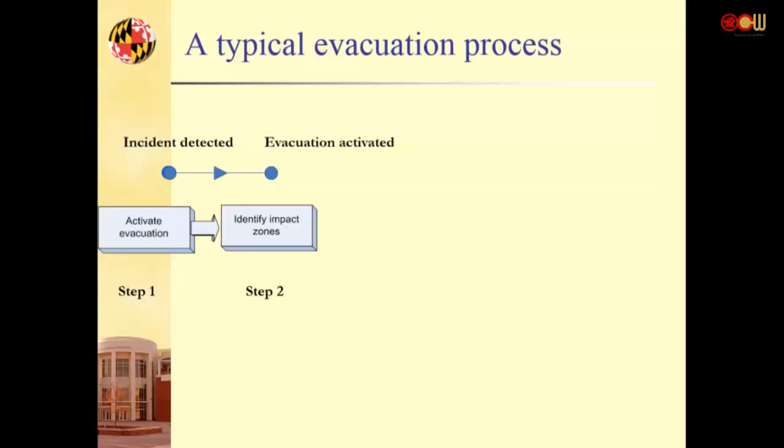And then second, they have to identify where the impact zones are, right? In Baltimore, it's in the harbor. The central part of metropolitan Baltimore is a harbor. So once you have an emergency, then next, how far is the impact going to be? So all those people within the impact zone need to be evacuated. And the first step, you can use Taipei as an example. If something happened in the Taipei downtown area, you need to evacuate. The first one will be what? Evacuate those people who have to walk. Walk to where? Walk to either a subway station or a parking garage. Evacuate the pedestrians first. And then all the pedestrians will be converted into what? Car units or subway units, okay?

In the Baltimore case, we actually include subway, but Baltimore only has one subway line, unlike DC which has 6 or 7 subway lines. So we treat that one as a separate study. So once you evacuate pedestrians, then we mobilize evacuation with passenger cars and transit systems. You have to use a mass transit system or carpool designed to evacuate a large population during a time window. A time window is a window in which you have to evacuate, otherwise you will die or be seriously injured. And then once the passenger cars have been identified and assigned routes, you have to guide them to evacuate in order to safely, efficiently move out of the control boundary. Okay, there's a control boundary.

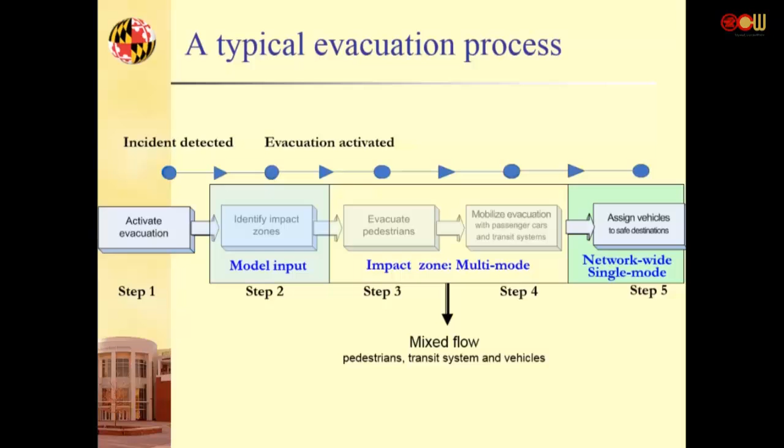And then after everybody gets on the bus, gets on the car, then from Taipei City they want to move to another city, then it becomes what? A single modal problem, because no one is going to walk to evacuate. Then you volunteer to die. Okay, so after some time period, you already load everyone in the car or bus system. Then the problem becomes a single mode network problem.

So this evacuation typically for a large city includes two stages. Okay, first in the downtown area, we think of the impact zone. Impact zone means directly polluted or damaged by some kind of attack, okay, or by natural disaster. For example, Kaohsiung's explosion is counted as one of the natural disasters.

It should have some type of evacuation. Maybe not on a large scale, but still, it could be worse. No? If a serious explosion continues, it could be a big problem. Okay, so that will be an identified impact zone area, and you quickly evacuate all people within the impact zone to a proper area. As I saw from the newspaper, some people died in the process of trying to escape from those areas. Those are examples of not having a well-designed evacuation process.

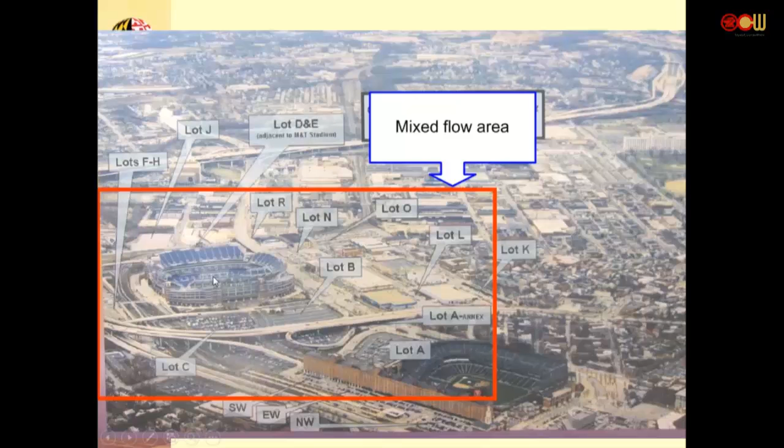Okay, then I will show you non-mathematically where the key issues are, the key components you should cover in doing research in this area. Okay, this is the actual Baltimore case. One of the major issues is downtown Baltimore. This area is a football stadium. A lot of people evacuate from here. So this is close to the harbor. Okay, so if something happened, you have to evacuate those people, or even if nothing happened, after a football game.

So in this fall season now, every weekend they have to deal with the evacuation problem. Of course, the evacuation windows will be a little more flexible than an actual emergency, but it's still a big traffic problem. Okay, so our challenge at that time was, we use this example, compare the police evacuation plan with our own plan, and see whether we really provide a better plan for them or not.

Okay, so Baltimore downtown is the harbor. This stadium is all in the downtown area. If you know Baltimore, you find out this entire city is developed along the downtown and the harbor. It's a nice place to go. Okay. So the first part of your model is different from the traditional model. First part, most people will be where? Inside the building. Okay, unless it's at night. That's different. They will be on the street.

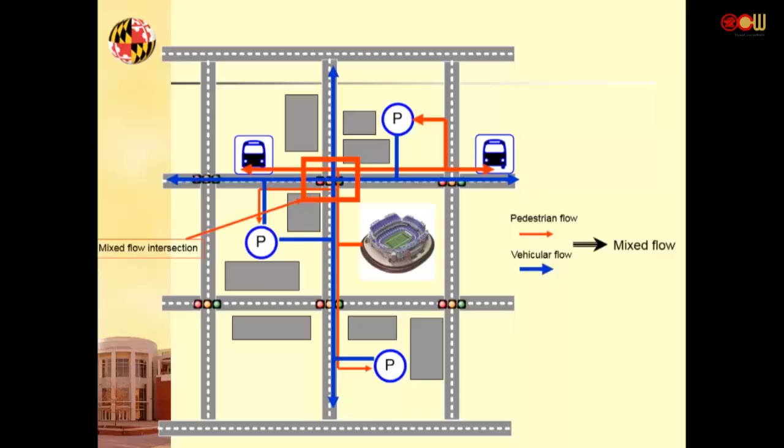And then you have the guided bus route. So here the bus route is different. Here, in this case, we use a school bus to pick up the pedestrians. In the United States, every school from elementary to high school, you always can take a school bus. You always have a school bus. Of course, if your parents want to give you a ride, it's okay. Otherwise, every family is entitled to have a school bus. So we have a lot of school buses. So in this case, we use school buses and some in-route buses.

In the US, the bus is not very popular, okay? So the bus, in terms of the fleet size, may not be sufficient. So we have to use it together with the school buses. So in this case, buses will be assigned to a pick-up point, okay. I will show you later in the models, okay.

In this case we published 4 papers. This is one student's dissertation and 2 programmers worked together. We published 4 journal papers and 3 TRB papers in this area. We will show each issue to you.

Okay, so this is the overall system structure. It shows you where the models are. One, you have the mixed flow model I just mentioned to you, okay. You need a pedestrian model. Pedestrian studies, although there are some, are usually location specific and not sufficiently general to be applied in different cities. So if you want to deal with Taiwan's own issue, you need to have your own study of Taiwan pedestrians' behavior patterns.

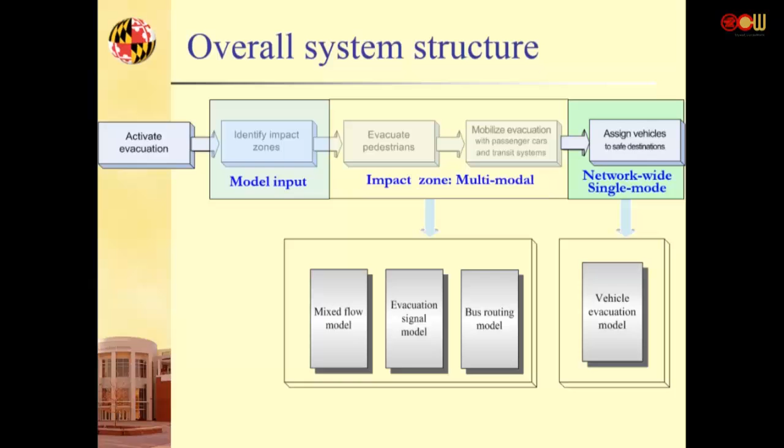And then once all the vehicles are ready to get out of the city at those boundary control points, you have multiple locations for your evacuation destination. Then you assign those vehicles to those destinations. In this case, this assignment problem is what? One origin to multiple destinations, okay? Different from the typical multiple origins, multiple destinations issue.

Okay, instead of showing you equations, I show you the system. You see the system, you should understand what the models behind it are, okay? So nowadays, if you want to be a good system engineer doing transportation, you also need to know computers very well. You may not know how to program very well, but you need to know how to direct programmers to do the work.

For our evacuation target, let every person get out of the beltway as our control boundary. The beltway is a control boundary, okay? But the destination is a little bit far away. You can see if you need to have such a system.

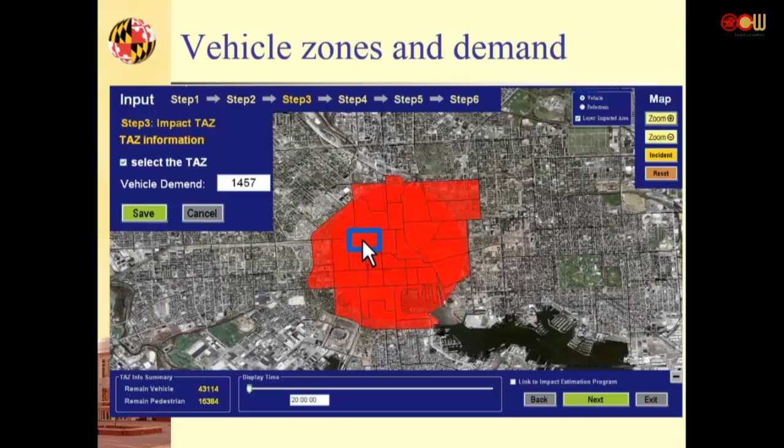That information has to be passed to all the potential evacuees in the area - if you work in Baltimore, you'll get that information. You may ask why we want to know this. During evacuation, if you tell people to go to a certain destination or intersection, they may not know it well. So the best way is to direct them to locations they typically use or are familiar with, and a bus stop is the one most commonly used by people.

People usually know their bus stop because they take the bus there, and bus stops are generally located in areas more easily accessible by most people. So we use bus stops as the pickup locations.

Certainly you have to study each bus stop's capacity - how many people can stand in the queue there - otherwise too many people there may block the street and become a bottleneck for the evacuation.

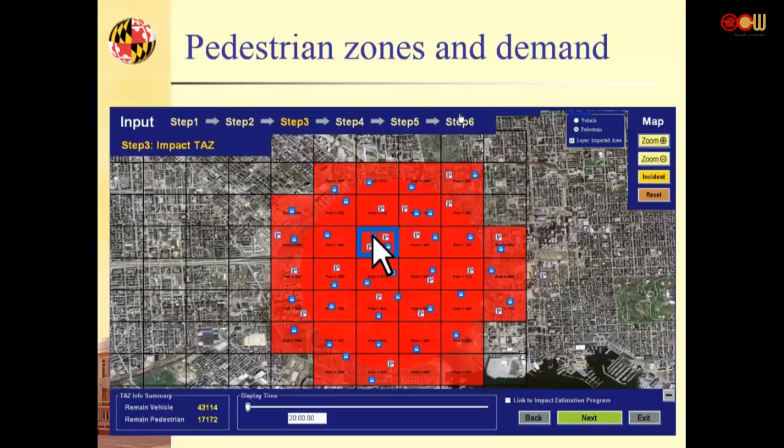Here's the actual stadium, right in the downtown area. From the stadium you can see the surrounding area, where the potential parking places are, and where the areas are that people could temporarily get together waiting for help.

So step one, we're going to assign the pedestrian path and pedestrian flow. Here's an example to show you. Those are parking areas, with cars there, and a bus stop.

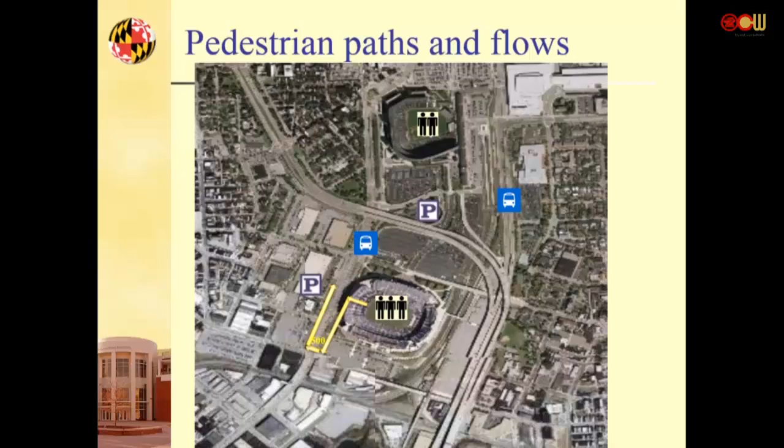You have to provide a route to guide the pedestrian. If you don't provide a route, pedestrians will walk in all different directions, every possible direction, because they are in panic. There are behavior studies on people's response under panic conditions. In an emergency, they lose direction and follow everybody, going where more people go, blindly following each other. So most likely they're going to cause more trouble for everybody.

So you need to give a direction clearly in your design, based on the identified capacity and identified demand. You need a pedestrian assignment model here. In this model, you have to think about how some may follow you and some may not, and what kind of message to give evacuees to ensure most of them will follow your direction. Those are the research areas you have to worry about in pedestrian assignment models.

So this is one example. We found out how many people from here should be assigned, 500 should be assigned to the bus stop, how many have a car in the parking garage, and for that bus stop or parking garage, with different paths. This is an actual case, using the football stadium evacuation as an example.

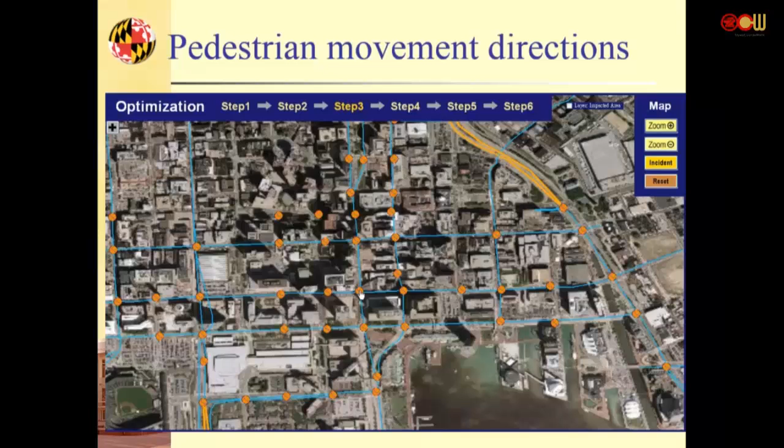So your system can help find out what the current signal design is and how you should provide information. For example, at this intersection, 70% should go this way, 30% go this way. You have to provide your timing plan according to your assigned path flow. So signal timing has to continually change.

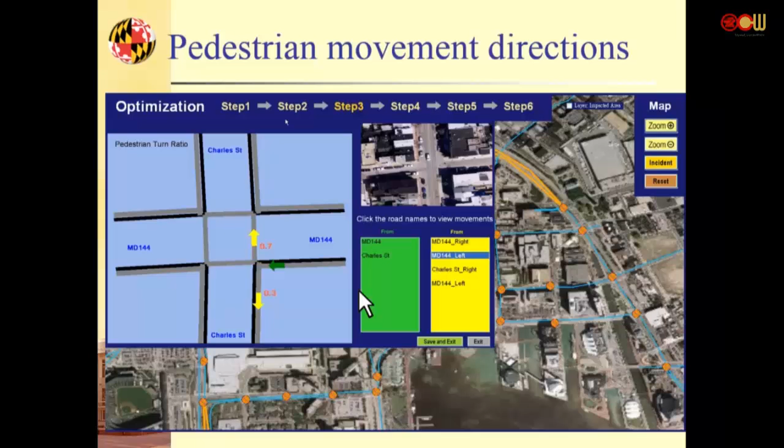Remember, there are two stages. In the early stage, signal timing has to favor pedestrians, because at that time most of the flow is pedestrian. But in the second stage, after most people got onto buses or into parking garage cars, the pedestrian flow will be converted into vehicle flow. At that time, your signal design has to change to favor vehicles rather than pedestrians.

So we have a special model designed to accommodate pedestrians. We call it the spatial mixed flow signal model. For example, here you can show three directions where we don't want cars to go, and only give direction to pedestrians.

This is the mixed flow signal optimization model, part one. And here the phase can change. Of course, you always allow the operator to change those plans, just as in Taiwan or most developing countries.

In Baltimore or Washington D.C., they have important people working in some areas, so they need special routes to let those people evacuate first. Especially in Washington D.C., my next example will show you. We designed a lot of routes there, but finally had to change many, because first they have a special route for the President to take a helicopter to escape.

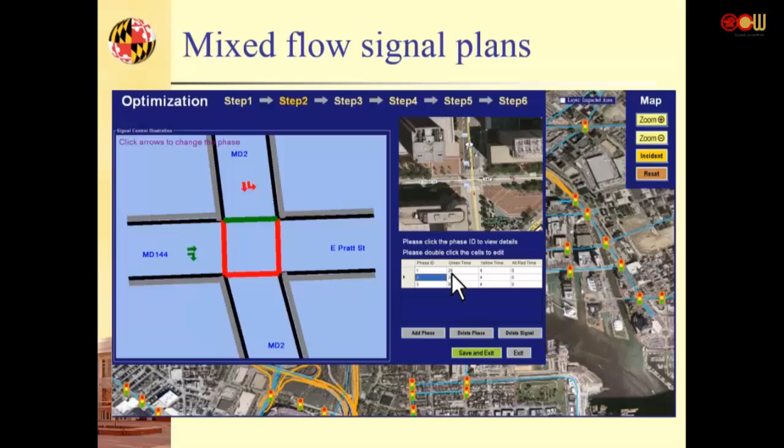Once you have a plan, this is a planning model, not a real-time operation model. So you plan based on the model, doing all the assignment. But in real operations, you base your assignment on the pre-planned strategy.

But in the meantime, you want to do an evaluation, using simulation, to concurrently simulate what would happen if everybody follows your pre-planned evacuation. Most evacuations, some percentage of people will not follow you, so it's impossible to have ideal conditions. But you want to know, under ideal conditions, what would be the time window? If under ideal conditions your time window is still too long, then of course in actual evacuation it will be much longer.

So here to show you, after we do all the assignment and guidance, then we simulate to see what would happen in the traffic condition. You can see the initial condition, and after how long the evacuation takes place, what the pedestrian network conditions look like. You can see after this time period, pedestrians are everywhere. This allows us to evaluate whether our strategy can work or not.

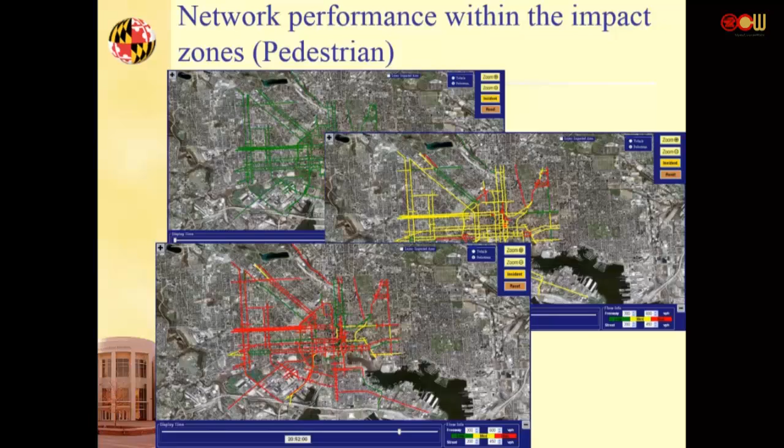And then you also want to see, within the impact zone, what the vehicle network would look like. You have two overlay networks: one for pedestrians, one for passenger cars. So this part belongs to the simulation.

Again, you can see this is not a typical simulation, it's a mixed flow simulation. You need a network that includes both vehicles and pedestrians. Most simulations cannot do so. This is special design and simulation.

So you can see, within the impact zone, this simulation shows over time what happened in the condition. You can see it getting congested at a certain time, then you can see after how long they will all be evacuated out of the impact zone.

Another important area to check is: if we all evacuate in the zone, where should they go? At the boundary of the evacuation impact zone, we set a control point, because at those control points you'll have police cars and law enforcement personnel. Evacuation requires law enforcement, but you won't have enough to stand at every exit, so usually you identify the most critical exit points. Then law enforcement will activate the system and control the process there.

So you send all the vehicles and pedestrians to the control point. Based on when they can arrive at the control point, you can see the departure pattern from the impact zone and approximately how long it would take to clear the entire impact area. From the arrival pattern, you can also see whether your plan was successful or not.

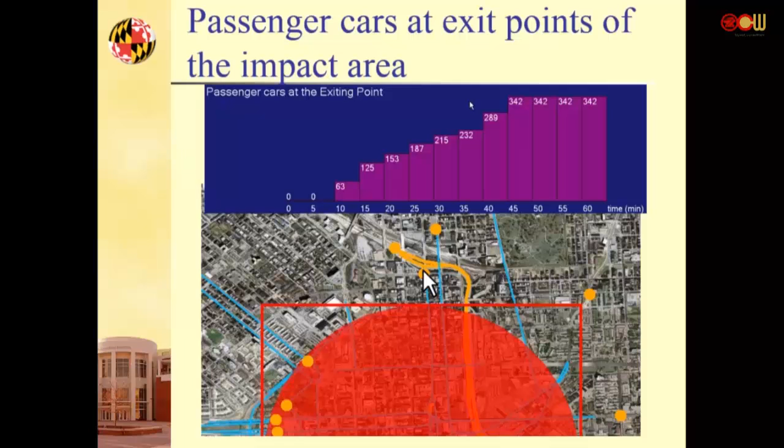They did an experiment where they put all the ants in a big bowl and created some fire, to see how the ants try to escape from a couple of small holes. They found out that without guidance, all the ants will compact together and crush each other. Same as in people's evacuation too. So you need to have a control point, clear guidance, and a strong message asking them to follow you, to put them through the evacuation process in an orderly way.

And in the meantime, during the evacuation process, you have to continue to check at different times how many people remain in the impact zones.

Why do I say so? Because in real world cases, even in your modern case, we are not able to take into account all the complex interactions in this entire impact zone. There are always some of the paths, some of the routes, some of the intersections you may not model properly, or that may have been changed.

So in the actual evacuation, if you don't do simulation, don't do evaluation and don't constantly check, you may find that most zones' people already evacuated, and there's one or two zones where people are stuck. That happens because your network structure may be convenient for some people in some zones to evacuate, but some people in a particular zone may all be blocked by other people.

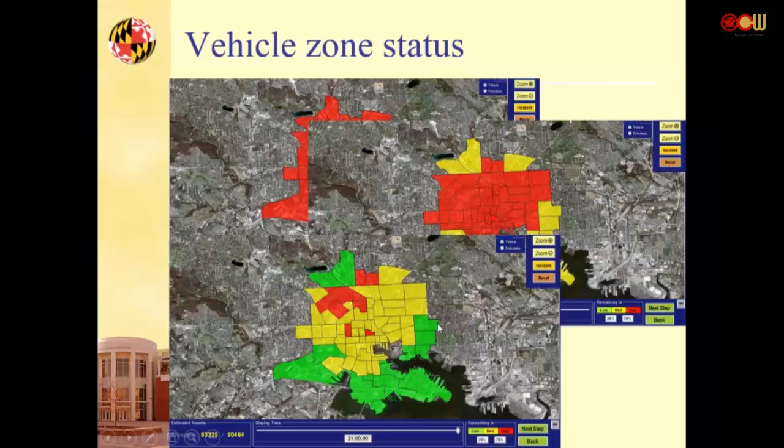Same as pedestrians. Pedestrians are usually less likely to be trapped because pedestrians are more flexible. They don't need to walk on the route, they can walk on the pedestrian ways. So it's less likely a pedestrian zone will be isolated and ignored by the evacuation process. I see over time, up to some time, most are green now or yellow now, representing they are all in good shape.

Then we're not done yet. You just see they already go to the bus stop or the pre-assigned loading point. Then your next job is you need to have a bus plan: how to assign the buses to come pick up those people. Where the bus comes from, you have to determine the route and stops too. Here's an example of a bus assignment model. Here's the bus routing and assignment model.

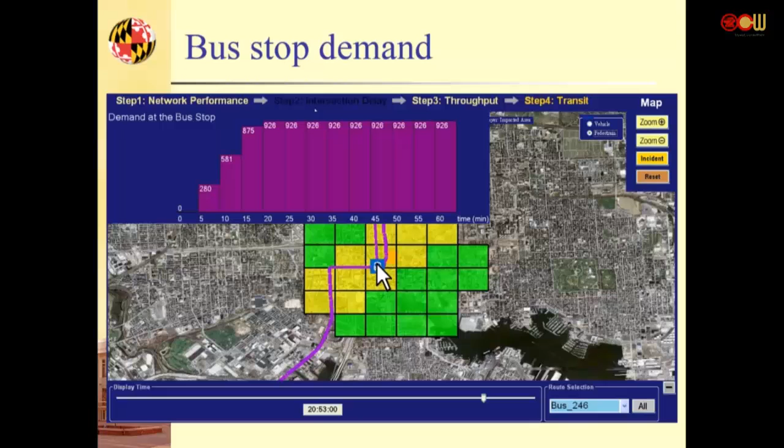So based on the previous stage, the pedestrian numbers get to the bus stop. So here's the arriving bus stop information. And at this time, later on everybody gets here, so it's reached the capacity, so no more arrivals. And based on the information concurrently taking place at all the bus stops, you need to do what? Assign the bus to come over here. And then you need a bus route. Where the bus comes from and where it goes.

So you have to input where the buses are. D represents the depots, just some buses or school buses stationed there, waiting there. After they drop all the school children, they stay there, or some buses, if not en route, will stay there. So in this impact area, you identify how many buses you can immediately use. And of course, you want to use buses close to the impact zone first. If not sufficient, you have to have buses come from other bus depots too.

And here are the bus routes. Everybody already knows those bus routes. So that is information easy to be used by the evacuees. In the bus depot, we need to know how many buses are available in those bus depots. Again, this number can change. For example, if you're doing the evacuation on the weekend, this number will be different from the weekdays.

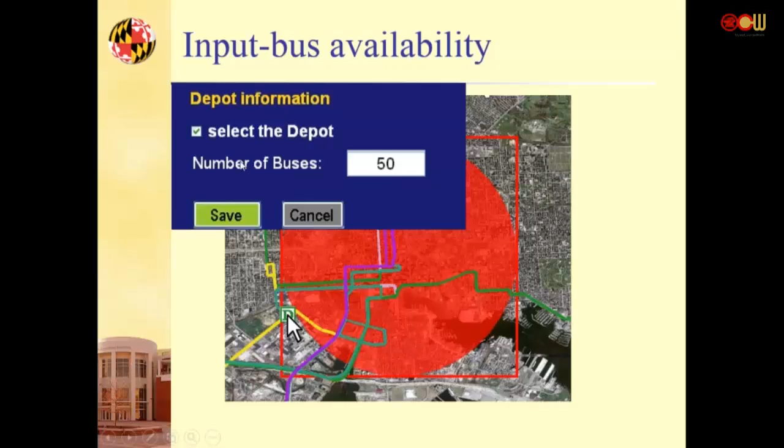And then you input bus destinations, if you have new bus destinations, meaning the locations where a bus has to drop people. This could be a shelter place or could be subway stations. For example, in some short distance evacuations, you try to send people to a university or high school to put those people there temporarily before they identify the need for further evacuation. Otherwise, the intermediate stage evacuation could be a school, a high school, some area. So identify those destinations for the bus to drop people there, and the bus can come back to pick up those waiting evacuees.

And so here I show you an example. Here's a bus depot and a bus destination. I show you, here's the impact zone, and this bus route, destination here. And this area connects to a light rail, I believe. Some light rail location. If buses drop people at the light rail location or at the subway station, it will be much easier to have a mass evacuation.

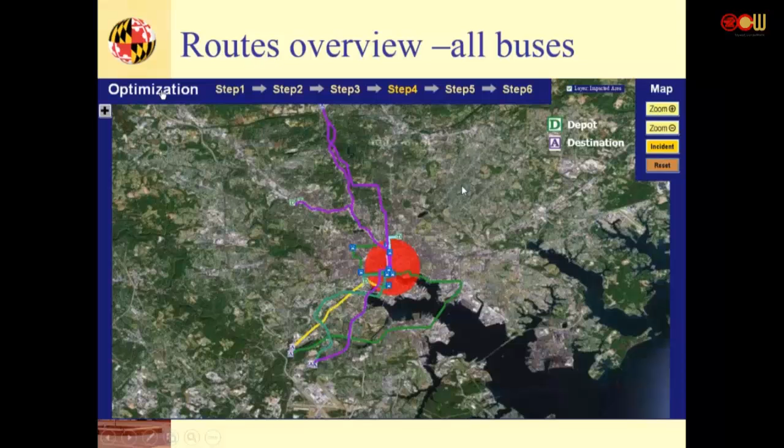I see these are all the bus destinations too, okay? And then you have to assign bus routes. Here I show you one example: each bus comes from the depot, picks up pedestrians or evacuees from one particular station, and then goes back to safety destinations. That's one bus route, and then it has to come back. Okay, the bus driver cannot just escape. You have to come back to pick up another run too.

Okay, you have to design the route. This time the route is here, and next time the route will come from a different destination too. Okay. So in actual operation, you have to consider very carefully every step in detail. Even if you have considered every step in detail, in actual operation there is still some uncertainty beyond your pre-plan.

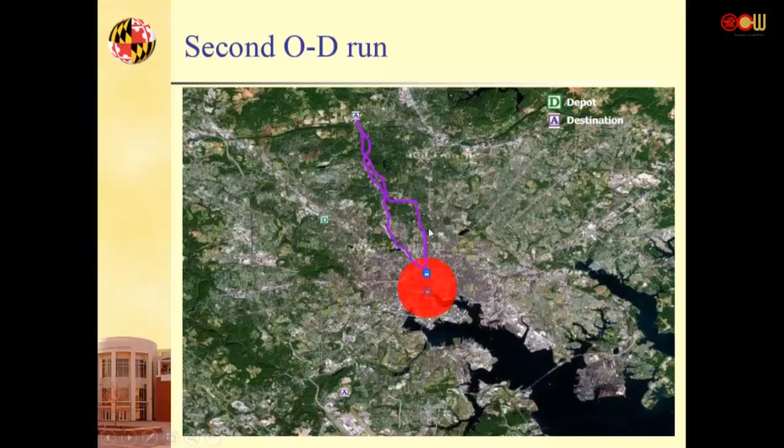Okay. The previous one is one bus. This one is the same bus on the second OD run, different from the first one. Because they come from here and go out there, and on the second run from the destination, come back to load some other pedestrians and come back again. So second runs. Here it shows the same bus for the different runs.

Okay. For all the buses, you have to produce the bus table for them. Here I just show you one bus, the previous bus, bus 246. We show bus 246 based on the evacuation plan, coming from the depot at time 0, and first it has to come to Mount Royal Road to pick up. There are 16 people. It takes 16 minutes, and drops off at some location, then comes back to the next pickup. So you have to design the entire bus route.

And where does the information come from? It comes from your mathematical models. Okay. So that's why I tell you, all of this you have to learn. I don't know who's teaching. I guess that's Joe teaching the network design.

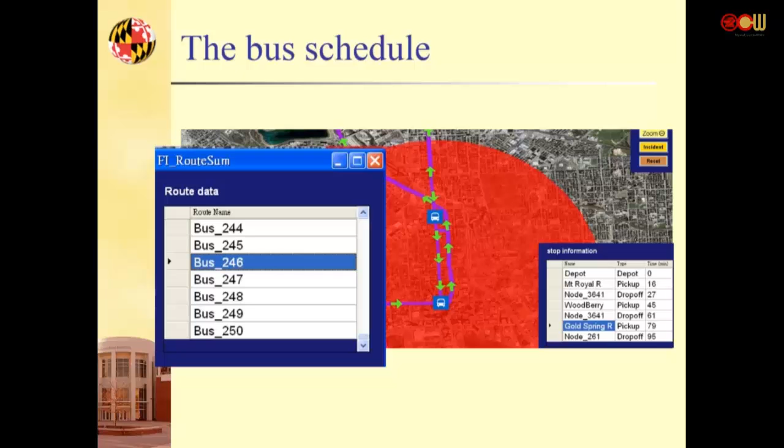Those are all useful. Every stop has some pedestrians, and they all experience some waiting time. You have to provide first come first served, and provide a bus routing plan at different stops. Okay. With all the available buses, you can use this same program to provide the evacuation. After all the evacuation clears the pedestrians, then you can compute how long it takes. If you use the given number of buses, for example, it takes 45 minutes to clear the entire impact zone, and then you compare with your time window.

If the time window shows you only have 30 minutes to clear the evacuation zone, and with your current bus or transportation mode you need 45 minutes, then you know you have to prepare. You know you have to buy more buses and make more plans to make sure that if something happens, you will have enough resources to evacuate those people. This is the most important function of these models for pre-planning purposes.

In actual evacuation, as I mentioned earlier, you still have to use a pre-planned scenario to evacuate. You may not have time to do the actual simulation operation. But this indeed will tell you where the bottleneck areas are, and whether, given the current resources, current capacity of the network, and current signal design, that would be sufficient if we have a major evacuation.

Same as I mentioned yesterday, if those nuclear power plants are going to have a disaster, do we have enough cars, enough service, enough routing plans to evacuate Taipei's population out of the impact zone within a certain time window? Otherwise, most of you will be polluted by the nuclear radiation. Okay. If you have a plan, you could still be in trouble. If you don't have a plan, then for sure you'll be in trouble.

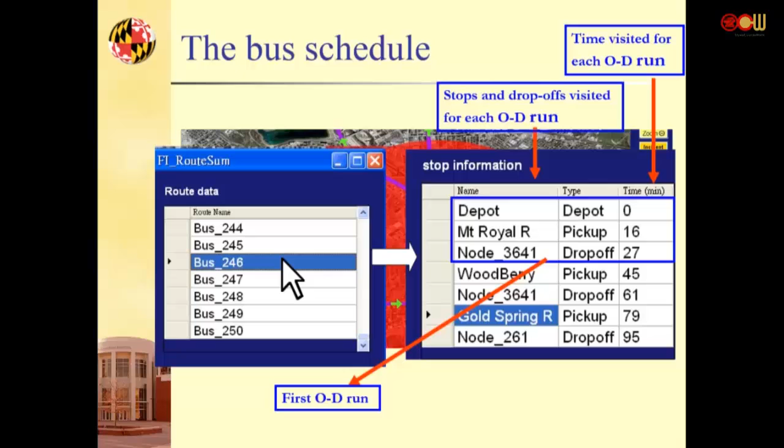And I told you that's all student research. That's all my PhD students' work: one major PhD, two master's students, and two programmers. And it's actually used now in Baltimore. And we have another online system. The simulation I mentioned to you, we also put it online, so it can apply in real time.

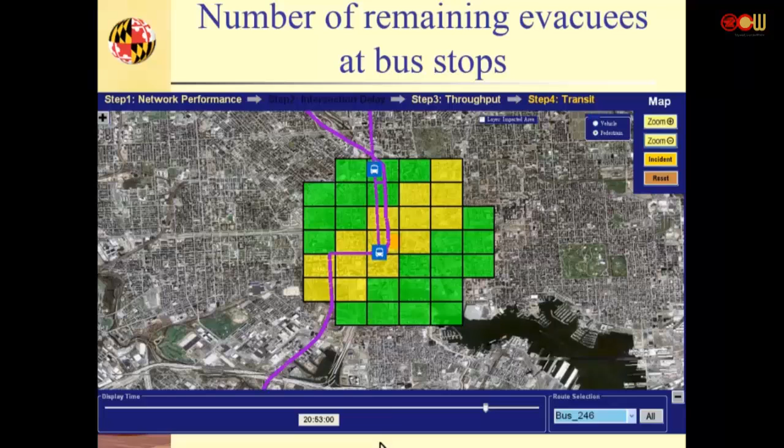You want to know how many evacuees are still at each bus stop. The bus routing plan has to dynamically continue to change, right? Because the people at bus stops are getting fewer and fewer, and the plan has to be changed. So you also have to estimate, based on the arriving pattern and the departure pattern picked up by the buses, how many remain at each bus stop. Okay.

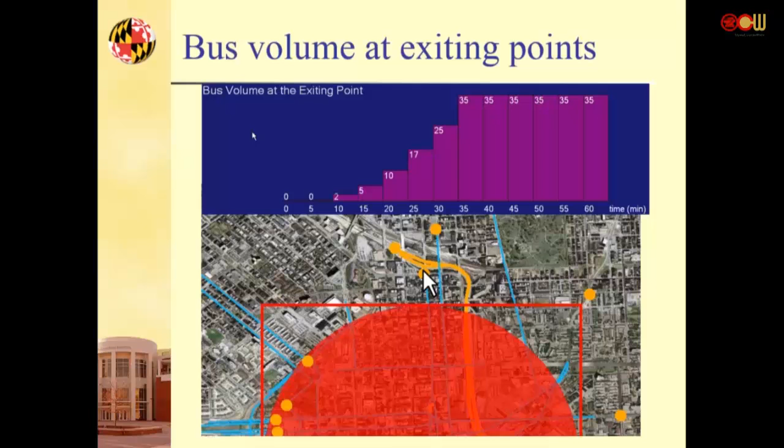And when buses pick up people, you don't want to create too much congestion at the exit point. Beyond the exit point, there will all be vehicles, no pedestrians. So you check every exit point, the bus volume, how many buses are waiting there or going through there. Partially you can know how many already evacuated and whether each exit point is overloaded or not.

Sometimes a particular route has too many people and becomes congested. Another route could be available, and you may want to evacuate people in that direction too. Remember, in evacuation we don't always evacuate to the area close to your home. Your home may be eastbound; we could evacuate you southbound too. Because our model's objective function is what? Maximize throughput and minimize the clearance time of the impact zones. Okay, this is the exit point path.

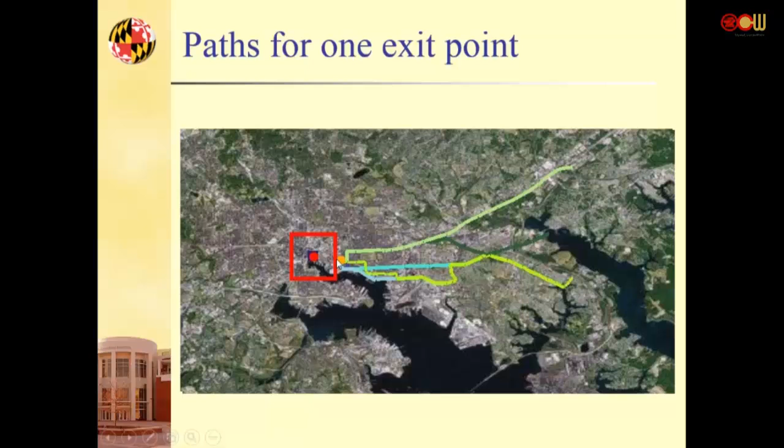The original one is a bus from some area picking up people inside the impact zones. If the bus or passenger car evacuates to the control point, then you assign the path to those far away safe destinations. So we have two-level path assignment. Within the zone, we pick up people, and after pickup, you don't want them to get out anywhere. You want them to go through the control point and go to the safety area.

Because in the evacuation process, you want to make sure the entire evacuation is properly monitored by law enforcement. People sometimes go there with nothing. You have to provide food and all possible supplies. They may not be able to come back for a week or a couple of days. You have to know how many go where, and think about those issues in advance. We are lucky in Taiwan, we haven't had those major disasters in the past 20 years, but there's no guarantee it will never happen.

And here's the distribution at the critical intersections. We want to know the conditions at all the intersections inside the evacuation, and whether we have to do anything or not. Here, those are critical intersections out of the evacuation zones. Then you know the current distributions, the incoming flow, and see based on the distribution what the conditions are.

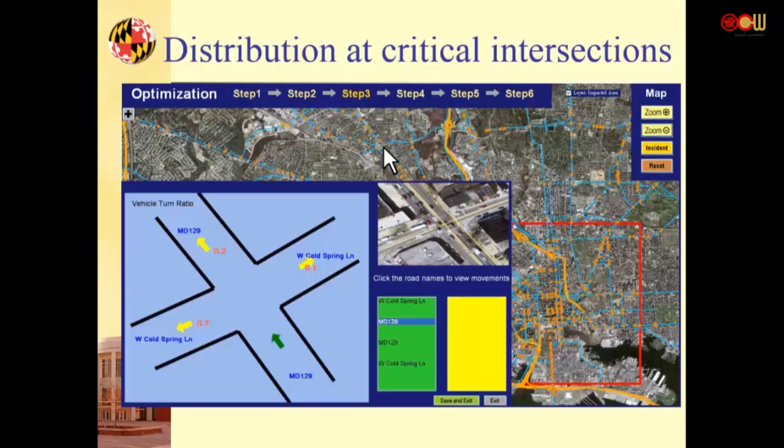I told you, in an actual real-world large-scale system with uncertainties, our mathematical model can never reach the actual optimum. Optimization provides a framework, but the input data is uncertain, driver response is uncertain, and some information we may not have. So you always have to use a feedback process to adjust and modify the control plan. But you cannot just use your own human intelligence without the mathematical model result as a background, otherwise it will be too far from the ideal control conditions.

So you may have to change the signal control as I mentioned earlier. So here's the actual intersection. Okay, and here's the graphic intersection. And here for every approach, each phase, you provide the signal timing, yellow time and red time.

Okay, so do you realize that in order for you to study the system, you also need knowledge on what? On database issues. So if you are a modern transportation engineer, as we talk about ITS researchers, you need to know a lot. You also need to know the database issues. You may not need to know how to do it exactly by yourself, but you have to design the plan for the programmer to do it. A computer programmer cannot do the job because they don't know the system at all. They know how to program, so you will be the one to direct them how to design.

By the way, this programmer is from National Chiao Tung University. I think he graduated, worked for Gongyan for a couple of years and studied EE in my university. And he came to work as a programmer for 2 years for this project.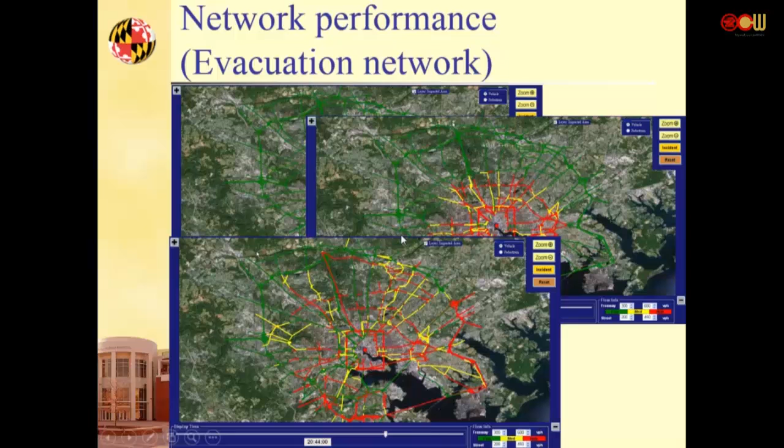And here's the example of this control boundary, this beltway. And here's 1, 2, 3, 4, 5, 6, 7 destinations, predefined in the metropolitan area. We define, if something happens, where you can go. Those are mostly suburban areas outside the beltway. For example, in Taipei City, Taoyuan could be a destination, or Linkou could be a destination. I don't know, I haven't seen Taipei's plan yet. But certainly you don't want people to stay within the Taipei metropolitan area.

And this is one of the most advanced, I would say, even in the current transportation area: multimodal evacuation. The only part that we did not include is what? Subways. Because unfortunately in Baltimore, we only have one subway and one light rail line, so we actually treat it as one bus line and send buses there. But the entire process, as you can see, covers what? You need pedestrian models to assign pedestrians. You need a signal model to assign the signals. And then you also have what?

Okay. This is another case study. It's a hard issue too. I mentioned the active traffic management. Okay, this is a good example. Now we are in the process of trying to extend this project to include ramp metering on the highway from Baltimore Airport to the I-95 commuting corridors. Okay, so this one is easy to understand, but also shows you what active traffic management is. The paper has been published somewhere.

Now I have trouble remembering where my papers are, but you can find it from the keyword, variable speed controls. You see, that's all my student's PowerPoint. That's one of my requirements. You've got to have nice, good colors, okay? Don't give me a dumb color, black and white, okay? I always give them trouble if they give me black and white.

VSL, you will see very commonly in the papers, okay? VSL and VSL combined with ramp metering together, they call active traffic management. And we actually implemented it, totally 10 weeks, I believe, okay? And I show you the three parts. What is a VSL? Because we try to deal with congestion on highways, and there are many different approaches you can take.

So one, of course, infrastructure renovation, which we call the supply side: extend the capacity, or add one more lane, build another highway, build another elevated highway from Taipei to Taoyuan, now going to extend to Hsinchu perhaps, and later on they extend to Kaohsiung, okay, becoming another elevated highway. That's one approach, but a very expensive approach, or add one more lane.

A second is from the demand side, urban planning, we call smart growth, meaning you try to control and decentralize the population that all goes downtown to work. You know, in the United States, in most cities, poor people stay in the downtown area. And if you are rich, you always try to go farther away. The Beltway I showed you, most rich people do not reside inside the Beltway. They're all farther away, okay? And that's causing a lot of problems, the peak hour commuting problems.

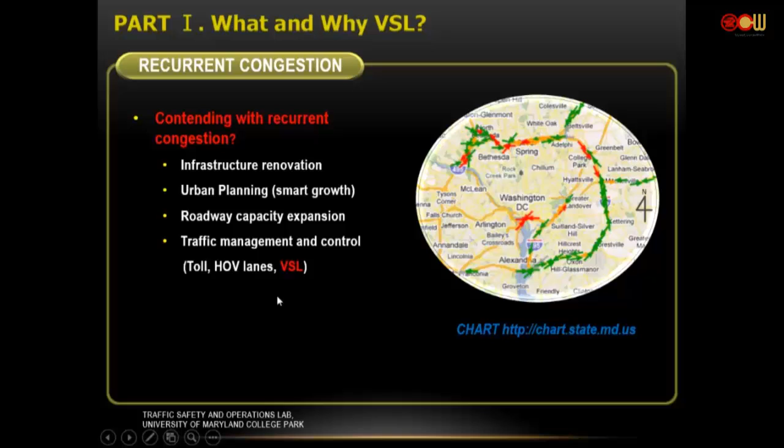So that's why we have ATM, and VSL is one of the strategies, okay? Where did VSL originally start? It started from the work zone area, and hazardous highway segments during snow days. Let's say during a snow day, we advise you to lower your speed to be safe. In the work zone area, our study also started from the work zone. We published quite a number of papers on work zone control issues.

Think about a work zone: if you have a 3-lane highway, I always mention, you close 1 lane, then what happens? Supposedly you have 2 more lanes of capacity, but in reality, you close 1 lane, you almost completely stop in the peak hour, right? You don't believe it, go try tomorrow. Just stop your car on the highway, 1 lane, during rush hour. Supposedly you have 2 lanes of capacity, but in reality, it completely stops. Why? People try to change lanes, they run at a very high speed, and at that bottleneck point, they completely stop.

And the capacity is underused. So you measure the output and found out the output flow is much less than the 2-lane capacity. That shows you have not really used the capacity properly.

This concept was originally used for non-recurrent congestion, like accidents or work zones. Then we thought about the same problem in recurrent bottlenecks, which have a similar pattern. Everybody tries to weave in and sneak into the bottleneck area, causing cars to drive very fast and then suddenly stop, then slowly move. So that's underutilizing the capacity because of weaving or shockwave problems causing the bottleneck. Those kinds of problems are candidate locations to apply variable speed combined with ramp metering.

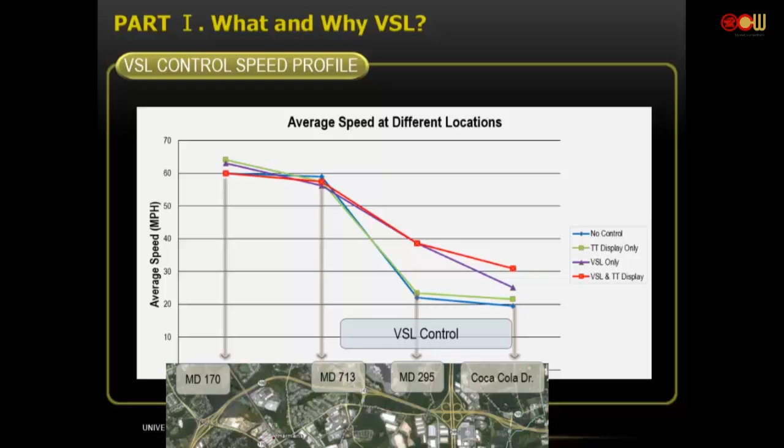The reason travel time is better is because these are advisory systems, and the driver is learning from the experience. The first week usually they don't follow you, but later on, day by day, they start to cooperate with you. Travel time is the way to convince them: if you follow my advice, you will have a shorter travel time. So we found that travel time information is a way to persuade drivers to follow your advice.

That is very useful because the whole active traffic management approach tries to get support and cooperation from the drivers. I'll show you this information. Then you can see this area of reduction in delay and fuel consumption is a contribution of variable speed control.

In other words, from the driver side, if you can work together, we can actually reduce the stop-and-go condition. I think many of you have the experience: you drive at high speed, and then in the bottleneck area you have to completely stop, wait for a while, and then slowly start moving again. So why not just slow down, instead of needing a complete stop?

Same as signal progression. Sometimes with signal progression you drive at very high speed, but to reach the intersection you have to completely stop. But if we do progression speed control and advise you of the proper speed, your speed may not be as high as you want, but you don't need to stop at the intersection. Altogether, you still have a shorter travel time.

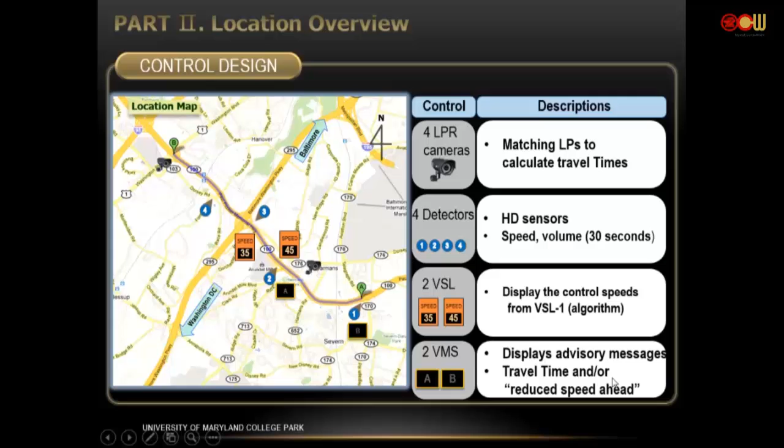Just a small experiment will show you what we have done. You have all the sensors, speed display, and early advice, early warning messages too. Of course, this one is operated by the university, so we don't have much budget to put in all the necessary components.

But the next one we are doing, ongoing now, I have a full actual deployment, not just demonstrations. So what are the components to complete the entire system? You have one control system for sure, in the control center to operate.

One roadside display, and also a website display. The website display serves two purposes: one, the control is done by my lab; one, my lab can see the travel conditions.

In real operation, you could do your own control at your office, but the roadside VMS may not display the information. This happened during the demonstration period - the connection between the message dropped, and then you'd find out you changed your sign on the website, but the roadside still shows the same message. So many of these problems could happen. So you want to make sure that the freeway or highway agency on-site people can access the website and also access the roadside, to make sure these two are showing the same control and operating under the same condition.

Otherwise, sometimes there's a connection problem, or you may not display the message properly. So we always need a website to share real-time information with all the involved parties. Okay, here it is. You see the first detector, okay?

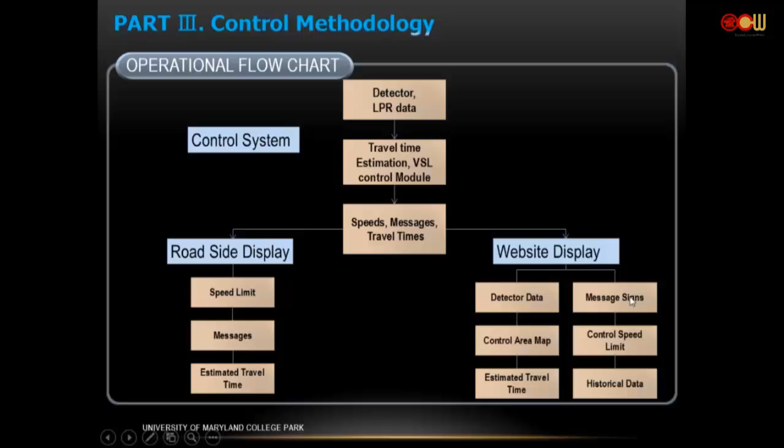In the website, control side, that's our university research side. You have detector data, control area map, estimated travel time, all the control speed limit information, and historical data. You continue to collect the data. Data is very expensive, especially in the United States, okay? Manpower is expensive. You guys are cheap, so you can do a lot of manpower data surveys. We are very expensive, not easy to collect data.

I told you, one student, one year's graduate assistantship will cost $50,000, okay? One graduate student given an RA, okay? In a private university, even higher. In the public university, the overhead is your salary times 1.5. Private university is usually times 1.8 or 1.9. So in a private university, usually one RA will cost professors $65,000 a year. That's how expensive. So I don't send students out to collect data. Too expensive, okay?

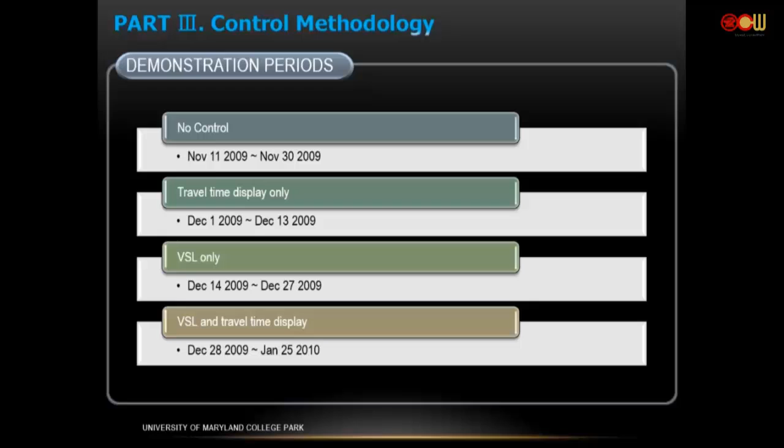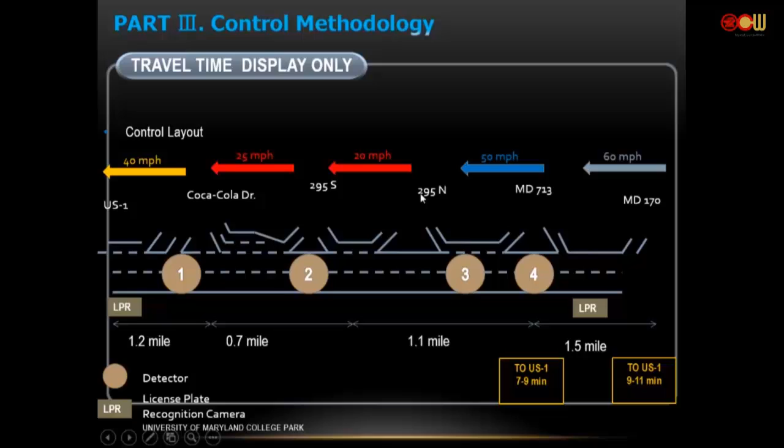And you want to do a before and after study. Step one, you want to make sure your before data is reliable. Otherwise, your before data fluctuates day by day or across different time periods. How do I know the after improvement is due to your system or due to the fluctuation of data? I saw some projects that found so much improvement, but before, they only had 1 day of data. So how could you know your improvement is actually system improvement or your demand change?

So we have done several days of data, to make sure your before data has reached stability. Then you can claim your improvement is actually due to your system rather than the daily fluctuation. And based on the stability analysis, identify spatial and temporal impact, and then compare MOE and reach a conclusion, okay?

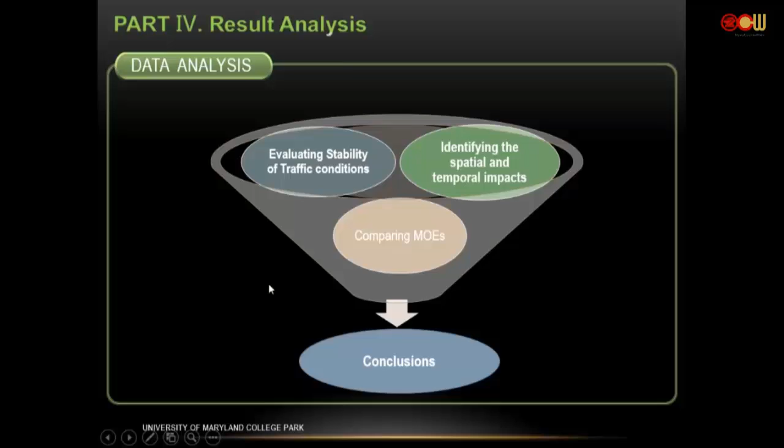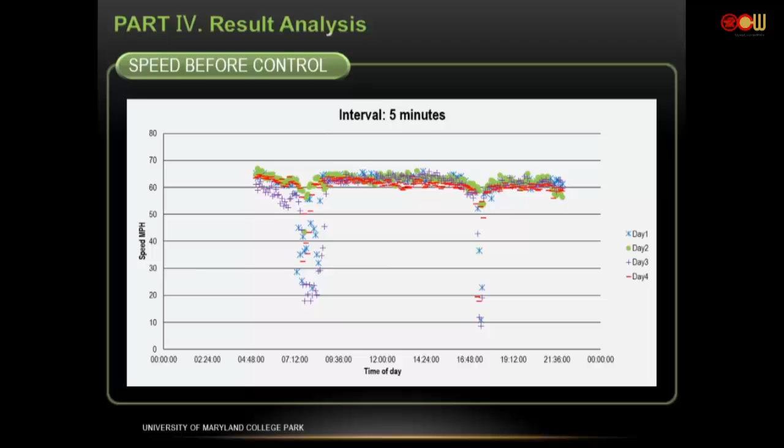So when you try to do a study, satisfying your sponsor is one thing. Your scientific work is another. You have to make sure your model actually improves, not just try to mislead the people, okay? So all the 3 days, 4 days show a clear bottleneck time period, clear bottleneck patterns. So average volume of the no control and travel time display show quite a stable period. So we can indeed use the information to do a before and after study.

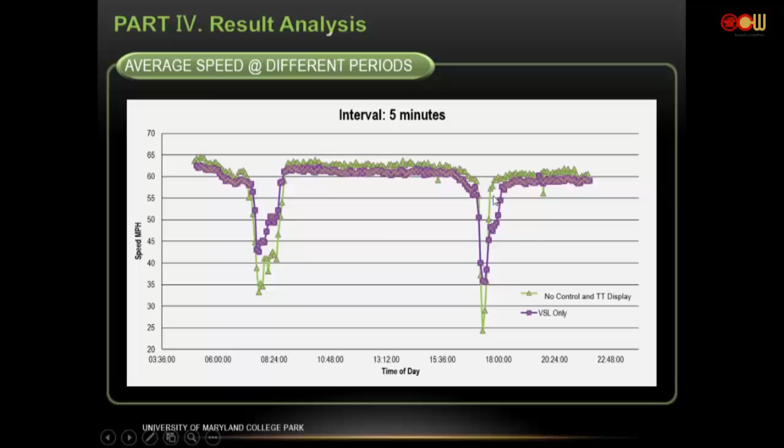And this one, if you put in the VSL and travel time display, some improvement, but some fluctuation here for that 1 day. But the evening peak has quite an obvious improvement, okay? Then you go into more detail. Again, this system was not completely optimized because this was a demonstration period. We wanted to make sure it was working first and collect data.

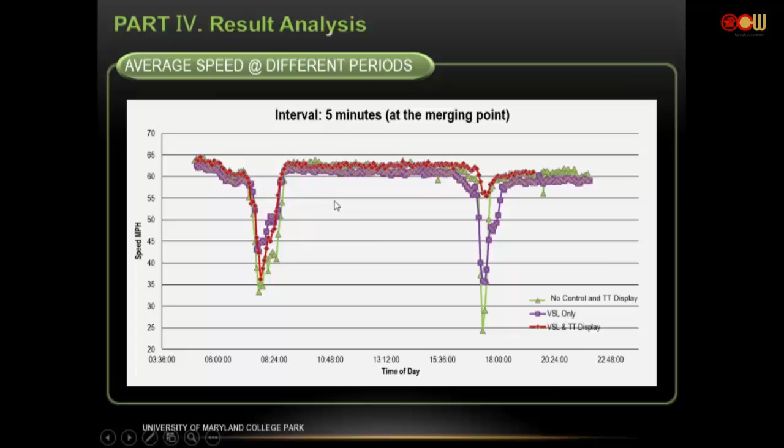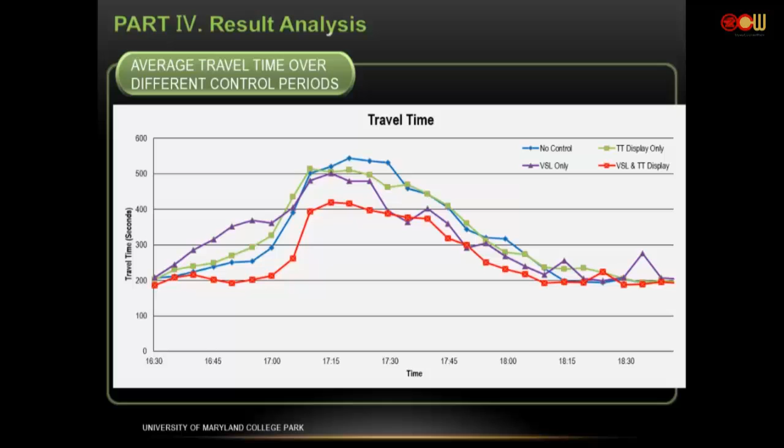And you also compare average travel time over different, longer time periods: 30 minutes, 1 hour, 1.5 hours. The congestion only lasts about 1 to 1.5 hours, so it's not long peak hours. These are the differences you can see with different control strategies, and they clearly show the improvement. I told you this is not even with fully optimized control parameters and dynamic change, because we are not allowed to put a mandatory sign, just a basic advisory.

So when we use the data, the first week of data is not much improvement, because in the first week drivers usually are not so sure, but drivers are learning. So the second week of data does have much more improvement. So drivers can also work with you.

I have heard a lot of people always say, oh, drivers are not good and not willing to listen to you. That's not always true. If your design is good, makes sense, and is useful, drivers are not bad guys. Drivers want good travel conditions; they will work with you. But if you have a lousy design, of course they don't follow you. You can see the differences.

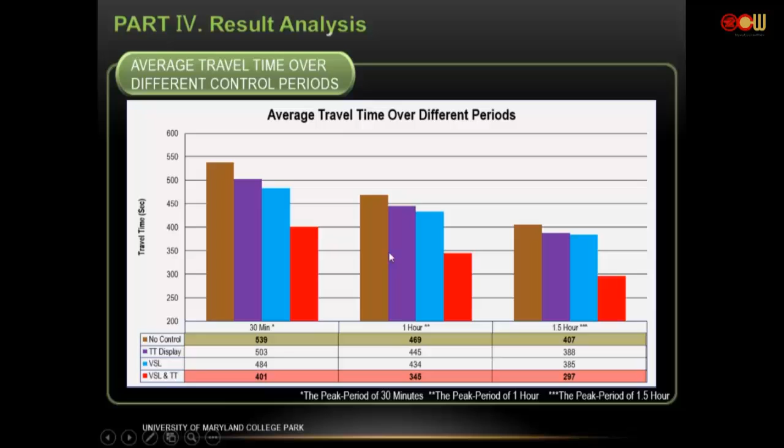They're all about the same because the peak hour is only 1.5 hours, so during that period most vehicles pass. So throughput is all about the same. The improvement is actually at the speed level. This throughput improvement is minor; it's really not the improvement. It's about the same level of traffic going over the same control period. The majority of vehicles pass; the difference is some take a longer time, some a shorter time.

For example, if you use 1.5 hours, these 4 will be the same, because given a long time period, they will all be the same. If you measure throughput without control over the peak hour, after the peak hour all the vehicles pass, so your measured throughput is the same. So if you want to measure throughput, you should use how many vehicles pass during the congested 5, 10, or 15 minutes. Then it shows the differences.

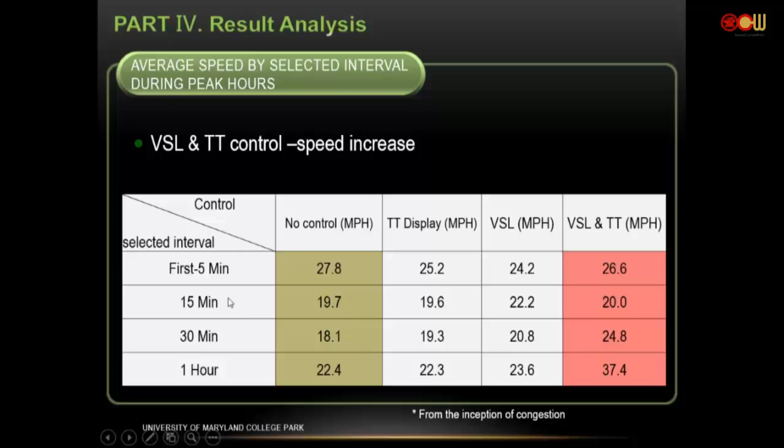So you have to make it clear. When you want to evaluate, you have to see small increments: 5, 10, 15 minutes, you do the time dependent comparison. You can see when it starts to show the improvement. You also know what the learning period would be day by day, and also the learning period from the control start to the control actually being effective. So it's important to show the time dependent comparison. We just show you the category presentation here, not all.

And then, what are the system products? You have a system module, travel time estimation. That's a mathematical model, not a cost. Travel time monitor system based on the detector information. Computation algorithm, that's no cost, you just know how to do it. Advanced travel information system. This is not necessary, but a good supplemental system.

As I mentioned, when you want the driver to slow down, you originally drive at 60 miles per hour and they advise you to reduce to 50. They will be reluctant unless they really know that by reducing the speed, I will not be forced to completely stop, and my travel time will not be increased. So they are more likely to follow you. So with travel time information, at least in the beginning period, you should have that information to give drivers confidence in your operation.

Some of the research findings: smooth transition between the free flow and stop-and-go flow. That's most important. Now this is very popular; some states implement the system mainly for what? Reducing accidents. Because coming at free flow speed and suddenly dropping to a very low speed, the shock wave will cause potential rear-end collisions, and that's one of the main problems. You can increase the average speed, reduce overall travel time, reduce potential incidents, and increase the total throughput during the peak commuting period, that means while still in the congestion period.

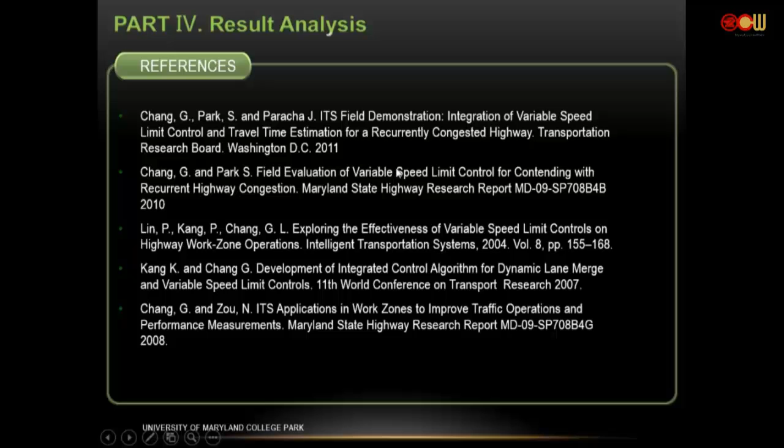If after the congestion period you measure the total throughput, it will be the same, because it's just the total number of people passing those areas. Certainly not much difference. In addition, the travel time control system reduces potential accidents, reduces fuel consumption, and reduces emissions. Those are some of the early references. Now there are a lot of those publications. You can read the TRB papers.

There's a second system. As I mentioned earlier, if this difference is not as high and the demand is high, you may couple it with what? Ramp metering here. That's what we're going to do. We found out in this area, after 4 years, demand increased a lot in the weaving flows. So you can put dynamic ramp metering here to control the flow, but the ramp metering will not be activated unless the variable speed does not show the impact. So these two combined together is a very hot research issue.

In the recent 2 to 3 years, there are a lot of papers, and almost all the major states try to implement the system because the federal government gives a lot of money for this study. So if you are interested, pay attention to this issue. The issue here will be, as I mentioned, how many detectors you need, how many segments you need, then how to set the speed control. Do you need a traffic flow model or not? Do you optimize the speed limit control for different segments at different time periods? That would be a complete dynamic control.

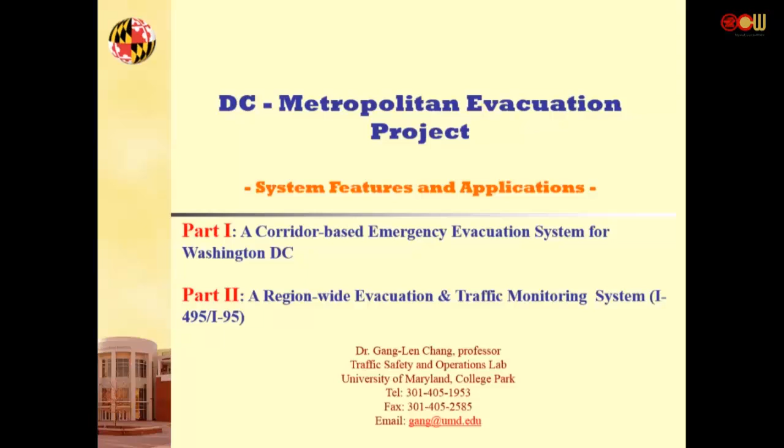So if the paper is coming from your actual system application, then that's more meaningful, okay? Maybe too early for you, okay? You don't want to do it just as an academic exercise, do a lot of papers, nobody pays attention, and never be useful, okay? May not be directly useful, but got to be useful. That is my suggestion, okay? And only if your work is useful or potentially useful, then you can continue to receive your funding.

Okay, I show you the one that's earlier than the Baltimore, the DC system. This is a different type of evacuation, the early stage. It's a corridor-based control rather than network-based control. And part of the reason, as I told you, is DC is a special area. There are so many restricted zones controlled by the CIA or those security agencies we cannot touch. You want people to go, they don't let you go, okay? So we changed the model to a corridor-based model.

GIS is very useful. Now it has become popular, so-called cloud-based system control, okay? I know some of you are working on it, but that will soon replace GIS, GIS and cloud altogether. It's a buzzword, but you have to follow the trend, okay? So the whole system, the features, what is the DC-based system? This has been used by some company, become commercialized. I did not apply for any patent or any copyright, so they actually use it without our acknowledgement.

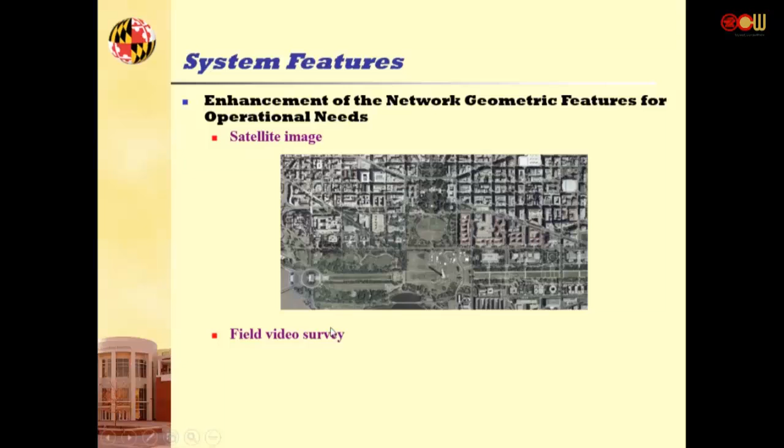Okay, the purpose is to create a corridor-based evacuation system. This is Washington, D.C. You can see there's the Potomac River, okay, beautiful Potomac River, and there's D.C. downtown. And this side is Virginia, the other side is Maryland. D.C. is cut one corner from Virginia, another corner from Maryland, to become D.C., okay? It's not a state. And the features enhance the network geometric features for operational needs. We use satellite images and field video surveys combined together as our background data.

It's the MPO, Metropolitan Planning Organization. Because DC covers three, almost like independent jurisdictions: Virginia, Maryland, and DC. So traffic here could be generated from internal DC residents, or a lot from Maryland, a lot from Virginia too, okay? So if you want to deal with the traffic problem involving three jurisdictions, you have a so-called metropolitan government working together, dealing with the urban planning and traffic issues.

For example, Taipei and Taipei County, the traffic comes together, right? A lot of traffic coming from Taipei County comes to Taipei City. And the signals on one side are controlled by Taipei County, the other side controlled by Taipei City. They don't work together, okay? I believe they're going to cause unnecessary congestion too, okay? The congestion level can be reduced if they work together as one system. For those kinds of relations, you need a metro MPO to work on it, okay? Major U.S. cities all have an MPO organization.

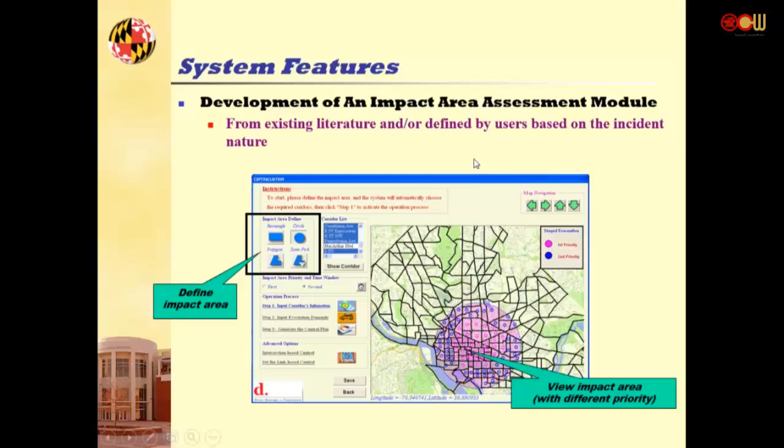Okay, similar to what we showed before, this is corridor-based, developing impact area assessment modules on a corridor basis, okay? And this one is more fancy. They have a different type of impact. It's a customized optimization model for evacuation routes on a route basis to get out of DC, because very few people live inside DC.

Only two types of people. One is very poor, one is very rich or embassy people, they work for embassies, or very rich people. A very small percentage are very rich people. Most are foreign government embassy people working there, okay? And most are poor people. So after evening peak hours, DC has no traffic. I don't suggest you go to DC at night either, okay? Not safe, okay?

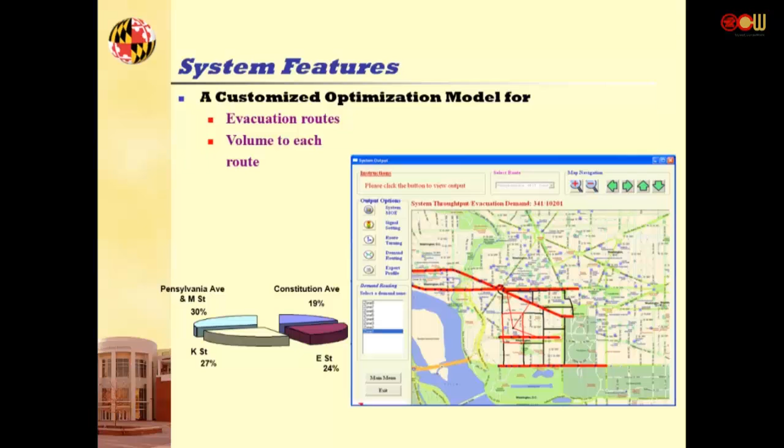In customer network, select critical intersection for optimal signal timing plan. This is different from previous designs. In corridor-based evacuation, you don't want signal control at every intersection, because too many signal controls create a problem that slows the evacuation. Also, you only allow turning movement at major intersections; otherwise you want them to just go out. Some key intersections allow turning movement to change directions, but all other intersections will just stay all green, letting them continue to speed up the evacuation process. The system will also have a 3D animation.

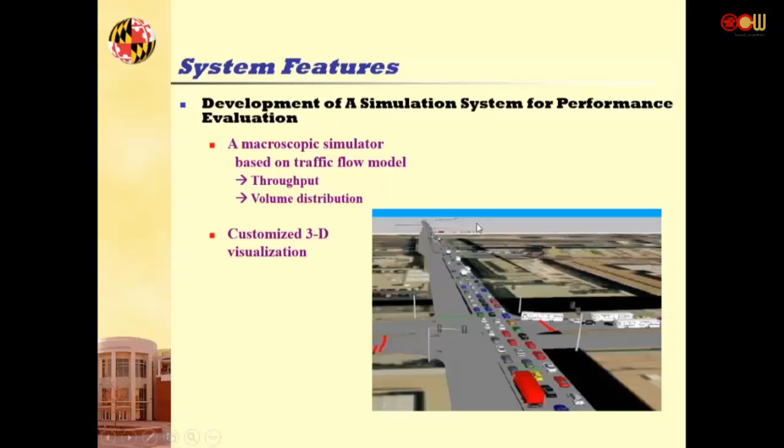Now 3D has become like a Mickey Mouse feature, everybody wants 3D. You need a customized interface for promotion packaging. The system's MOE, signal timing plan, routing plan, demand routing, all have customization. Our purpose is to get the system done so our sponsor can use it directly, without needing a training workshop.

This D stands for DDOT, Washington DC's Department of Transportation. This is the entire system structure: input modules, incident impact area, contra-flow options, your time windows, stage evacuation as I mentioned yesterday. You may divide the population into different batches, or the control room into different areas. You need a database for evacuation network and evacuation demand, you need both.

Here I have a rule-based network decomposition. You want to decompose the network, one side for Virginia, one side going to Maryland, based on your optimization module for control. This output gives you text output and summary statistics, plus a map output too. This is basically the whole system structure.

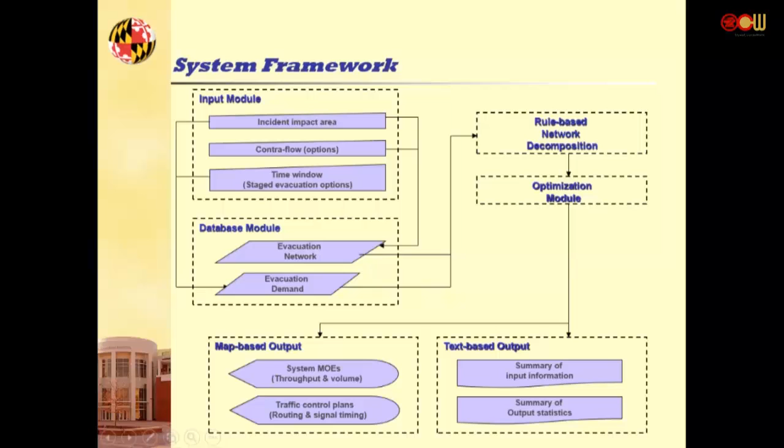This is a case study, the actual Union Station. Union Station is the railroad station. Long time ago the railroad was still the main transportation mode, but it's still in the downtown area. If you want to go to New York, you take a train here. We don't have high-speed rail in the United States, unfortunately, so you take a train or fly from the airport.

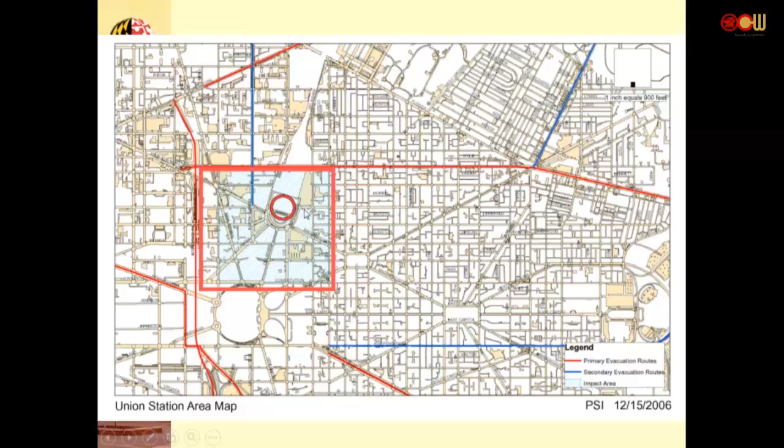So this is the demonstration case study; they actually demonstrate and evaluate. This is the area where a dirty bomb was identified by security people, and then we immediately estimate. There are two issues you need to understand: in evacuation, if the impact area is within some control, you don't want a large-scale evacuation. You only evacuate those people within the impact area.

Otherwise we cause panic for the entire city. So in this case we identify how wide the impact area is, and you only control those routes necessary to evacuate the target population. You don't want to make the entire city's people unnecessarily panic. That's called a control-scale evacuation. The previous one I showed you was a full-scale evacuation, slightly different. Full-scale evacuation is network-wide evacuation, while this small-scale evacuation is corridor-wide, by corridor rather than by the entire city.

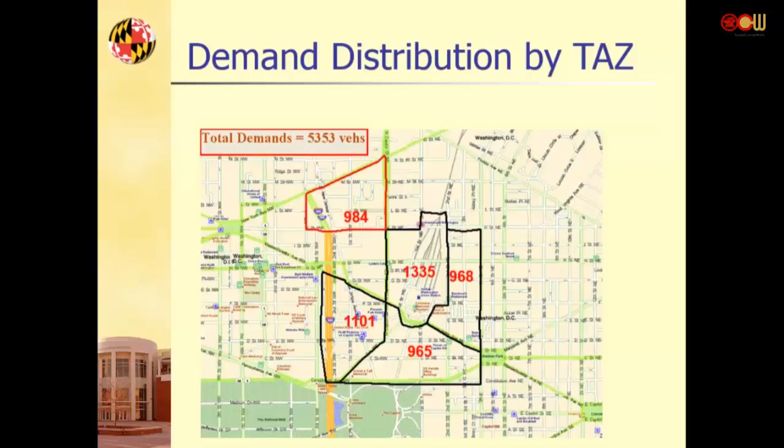Here's the impact within the impact zone. There's a TAZ zone, all those zones covered in the impact area. We know the car, pedestrian, and vehicle demands, and those are the targeted demand we have to evacuate. This certainly is a small area evacuation. You can see from here the zone, how many people are in the zone, just in the central downtown DC area, but it's a limited area, with total demand only about 5,000 vehicles. This is the location here, and this is the Potomac River.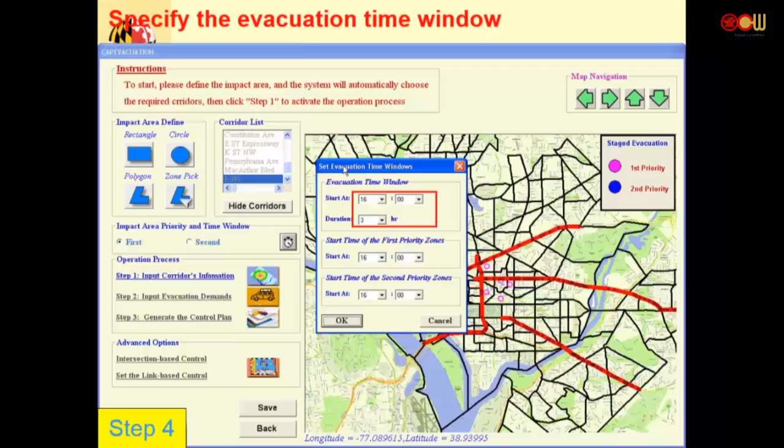And then based on the evacuation time given by the Homeland Security agent, they tell you when you should evacuate. The highlight is your job is to determine how many people should be assigned to each route, each artery. The model's main purpose: one, identify how many would be sufficient to evacuate the target population.

Second, how many should be assigned to each route. Third, this dot point represents a control point. There are so many intersections, but how many should have a signal? The remaining intersections you will turn off the signal and let it all go green, because this is mostly one-direction flow.

Ideally you will have all green. But some intersections, for some response operations, you need a signal for them to turn left or turn right. But we only, by model, identify where are the locations allowing for signal control and turning movement. That's also part of the model's function.

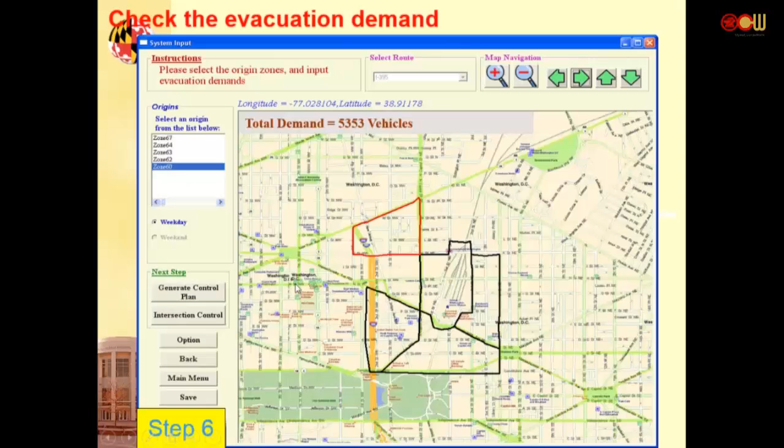Then you can see based on all the zones, you can see the demand here. Then you can run your system. As I told you, this model has hiding behind it a signal automation model. The first one is the assignment model, which assigns evacuees to different corridors.

Second, a signal model to determine where are the critical locations. Third, determine the timing for those locations and different phases. The system MOEs you can see: signal timing parameters, intersection turning fraction for only those critical intersections, demand routing - those are the outputs of the model. Each output has to be supported by some mathematical model, which is our students' research.

Okay, then here's the system output MOEs. This tells you at this time period, update time every 5 minutes, starting time, duration 3 hours. At different time periods, when you start the system assignment evaluation, you can see up to now 85 people out of this number have been evacuated - system throughput.

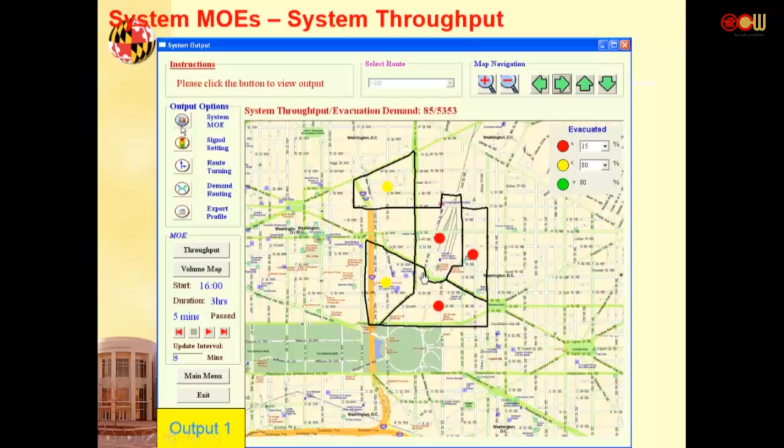And this defines what percentage has been evacuated - that's less than 15% evacuated. You still have a red dot. This shows the condition at each route volume - the route volume, corridor volume map during the evacuation process. You want to make sure the demand is properly allocated at different routes, otherwise one route could be very congested while another is light.

In this control operation, the safety destination for them is to go to DC's Beltway. The next one I will present tomorrow is the Beltway evacuation, because from DC government's point of view, if you can escape and get to the Beltway you are safe, and that job becomes Maryland's job, becomes Virginia's job. There's still a jurisdiction problem - they're only responsible to get people to the Beltway area.

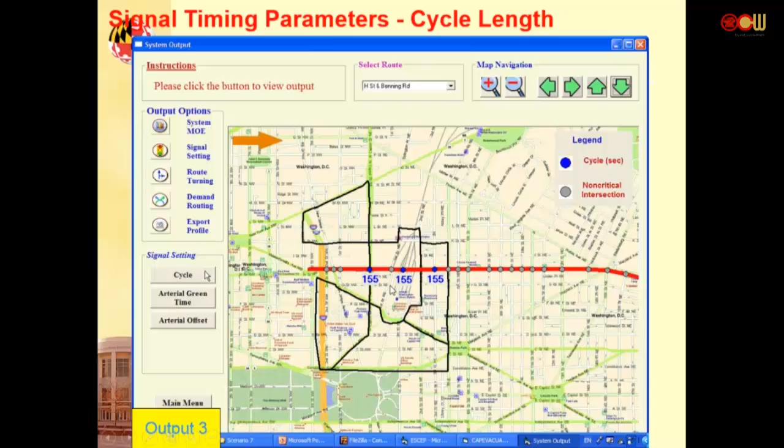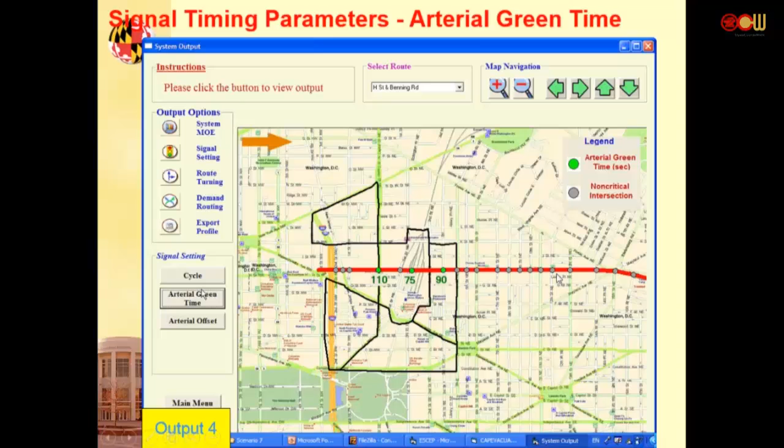Your model also has to provide cycle times for each critical intersection, so you know the green time for these directions - green time for those with no control. No control means currently they have signals but we just let them all go green, you cannot do the turning movement. Ultimate control point means at the key intersections you will have to design what percentage can let them go left and right.

And all the access points - access point means from the impact area, getting to the major corridor. Those impact areas still have some walking distance or some small segment for you to access, and whether they can access properly or not is also one of the issues.

So for example, demand here, they can go to two different directions - which one will you guide them to go? That has to be based on the model, and sometimes trial and error to make sure you balance the condition on those routes.

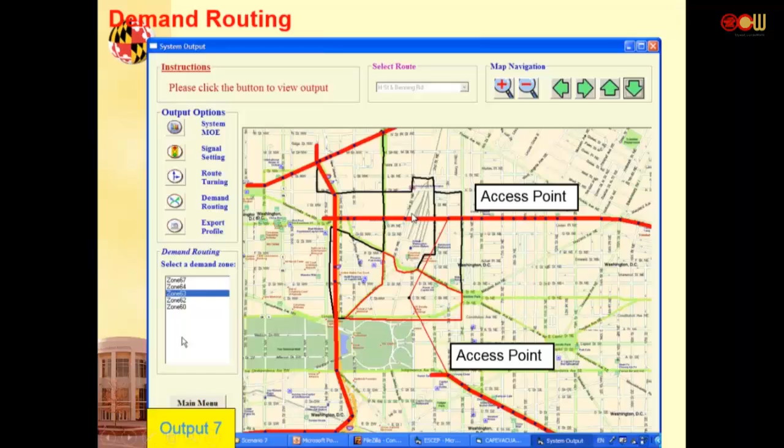So we found out clearing the traffic takes about 55 minutes for all vehicles to enter the safe area, which is the end of the corridors, some interchanges on the 495 Beltway. And here you can see our system throughput - up to 55 minutes, 100% already evacuated. You take how long? 55 minutes. This is a control time window - when we define how long it takes to evacuate, that will be the clearance time. 55 minutes is the clearance time because we want to make sure everyone gets out.

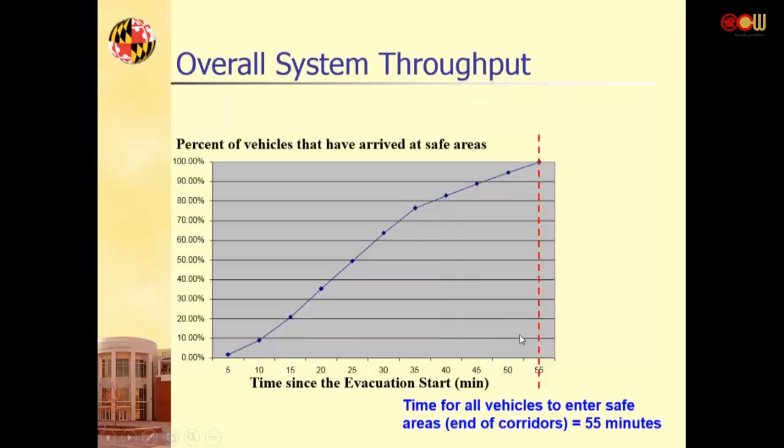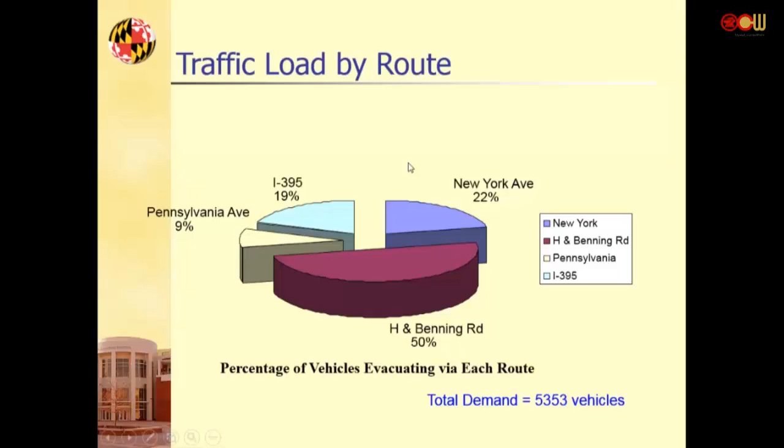Mostly it goes to this route. Here's the vehicles entering the evacuation corridor, okay? It just means when they get out of the system. From 45 minutes, they're all already out of the system, and it takes about 55 minutes to completely reach the destinations. And this is each TAZ.

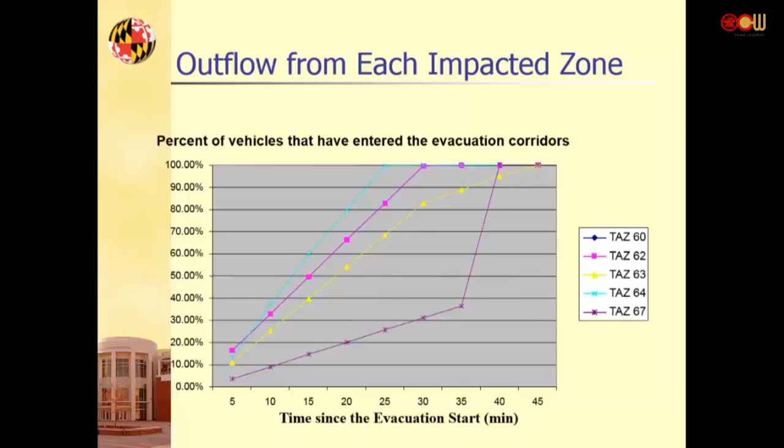Imagine you can have stage evacuation, intersection control, link control, travel time estimation. In this case, originally we did not provide travel time, okay? And later on we added some more functions. You can have stage evacuation, even some areas can have first priority, second priority. Why? You try to approximately balance the travel time, balance the evacuation time for people at different zones.

Some first priority may take a longer route. Second priority may take a shorter route. So there's a different concern on how to finally reach a minimum level of clearance time. Your ultimate goal, for first priority, second priority, even third priority, is to smooth your demand.

To minimize the load to the traffic network. The ultimate goal is to try to minimize clearance time, okay? So how many priority levels you should have is still based on your model. Based on the model, you compute who will be in this priority list. So you add this function to the system, supported by another stage evacuation model. This has also been published, okay?

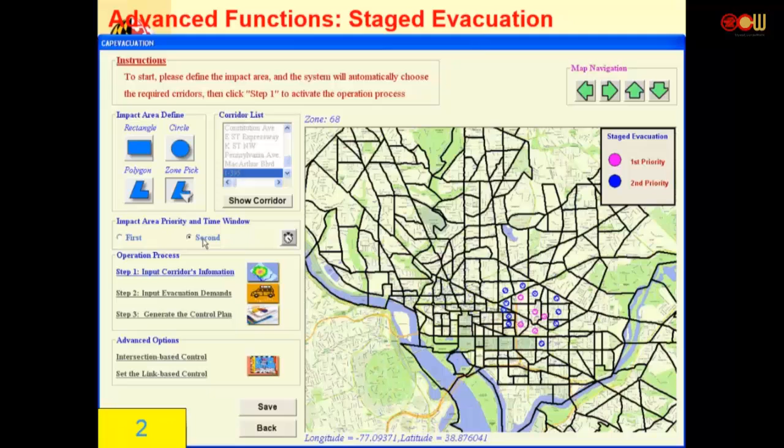You can also have intersection control and reverse lane operation. I think that's reverse - we have a reverse lane operation here. In DC, the routes are always small, have a clear boundary, so you can do a reverse operation in the model too. But I mentioned earlier, this reverse operation has to be done very carefully, because just reversing one link could create a bottleneck downstream, okay?

For example, congestion at one link - you expand one more lane, induce more traffic, it could be a problem for the next link. So not every link can do the reverse lane operation. It has to be multiple links together, related to the actual demand distribution. Otherwise, using reverse operation, adding lanes, could improve the current condition but create a worse condition downstream too. So this has to be pre-planned. It could also cause an accident if you do not plan properly, okay?

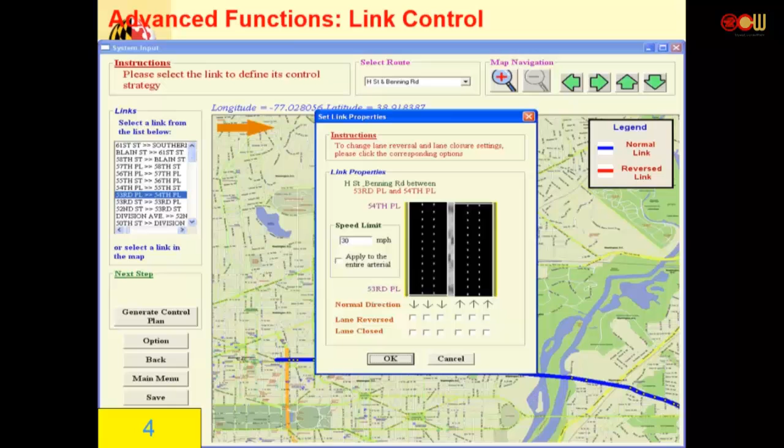People try to use the reverse lane and then go back to the former lane - that transition process has to be designed properly, okay? And we also provide travel time information, so you know, okay, you ask me to take which route, what will be my travel time, am I safe or not? Otherwise, everybody may try to run to the route they believe has shorter travel time, and the outcome is the route with shorter travel time becomes a longer travel time, and becomes a bigger issue, okay?

Estimate traffic condition and output, okay? And here to show you the route condition after what - after 2 hours has passed, and what the traffic condition is, okay? Okay, we're done here today.